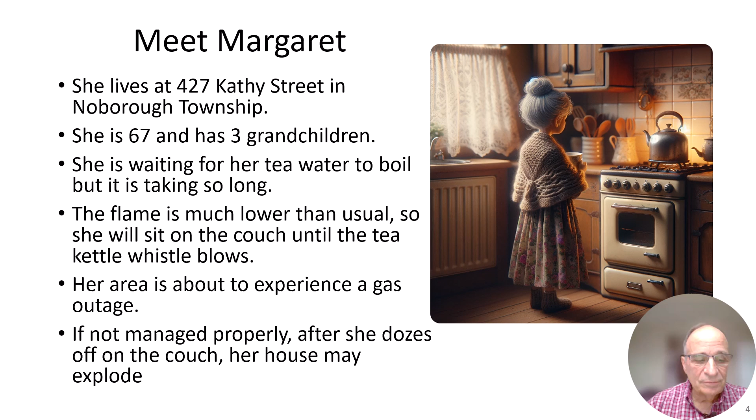Now meet the new Margaret. She awoke outside her house with her hair smoking. She never did get that cup of tea, and she gets real cranky when she misses her tea. But what really has her angry is that her house is no longer in its place, but scattered across the property. She does not know it yet, but her house blew up due to a mismanaged gas outage.

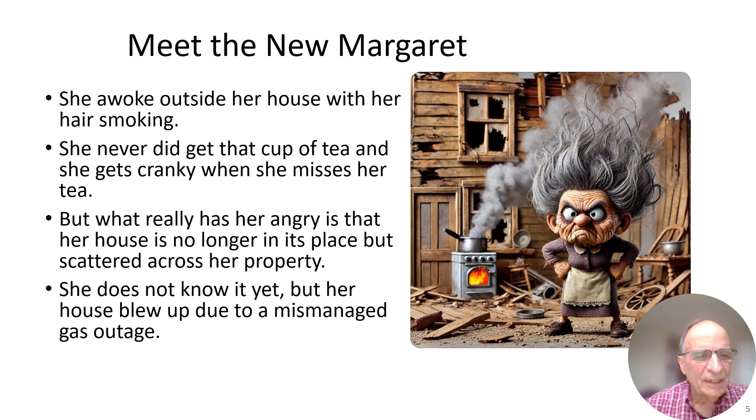What is the hazard associated with a gas outage? In a gas outage, low gas pressure may cause the flame on an appliance to extinguish. If the appliance is not equipped with a flame-sensing shutoff device, the valve that allows gas to flow will remain open. When the gas is restored, gas pressure is restored to the gas main, the gas will resume flowing into the appliance, which no longer has a flame to consume the gas. That gas accumulates in the house and reaches the explosive mixture range. The air-gas mixture finds the source of ignition and explodes because the house is an enclosed space.

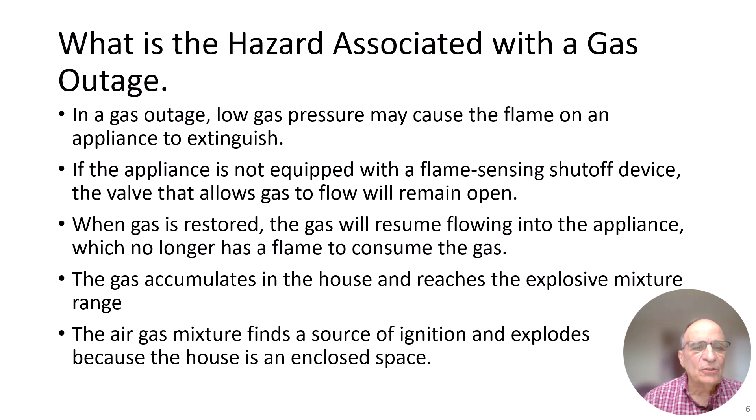How low of a pressure would cause a flame out at an appliance? It's unknown because each appliance is different and each house piping setup is different. Some local distribution company operators use the following as guidelines for what they consider low pressure concerns. For a 60-pound system, they typically use 5 psi. That doesn't mean that you'll get a flame out if you get to 5 psi, but it's the pressure that is of concern to the LDC operator. For low pressure systems that typically operate between 6 and 8 inches of water column, pressures below 4 inches of water column would be considered insufficient or of a pressure that would be a concern to a gas operator.

Many gas appliances have gas regulators on them that are set to supply 3.5 inches of water column to the burner. Now, the numbers that I mentioned are not necessarily meaning that below those pressures you'll get an appliance flame out, but it's where LDCs typically get concerned about the potential for a flame out if the pressures get that low. The other thing to be concerned about is that where you're getting your pressure recording may not be the lowest point in your gas system. So a gas system analysis study would tell you where the lowest points are. And also the telemetry involved in getting feedback to the control center may not be accurate. We'll talk about that a little bit later on. But these are some of the concerns that we will address.

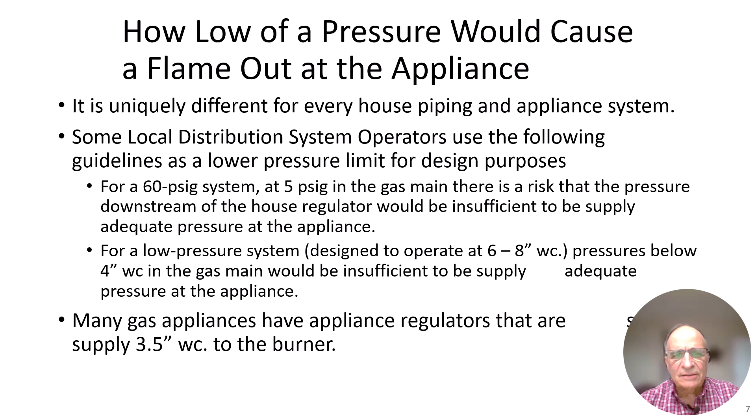So what are normal distribution operating pressures? They're dependent from company to company. But for the most part in the United States, it's very common to find 60 psi systems, and also in some of the older city, low pressure systems. A 60 psi system has 60 psi gauge as its MAOP, maximum allowable operating pressure, but it might typically operate between 20 and 50 psi-G. Inches of water column systems are typically found in the older cities, and these would be operated between 5 and 8 inches of water column. When you get down below 4 inches of water column, it starts getting to be a concern because of lower pressures being applied at the appliances.

A gas outage can happen any time of the year, but LDCs are most vulnerable during the coldest weather conditions.

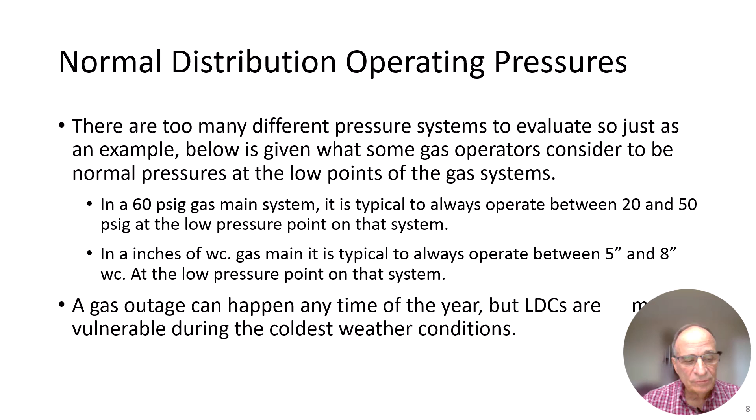I'll now talk about gauges and telemetry. They cannot be trusted for accurate readings.

Here's why. You're operating a system for 10 years, you've never had a gas outage, and you're always looking at your gauges from the control center. The question I have is, when was that gauge and telemetry last calibrated? You might have a zero offset, or a span offset, or some false reading, and you're off by maybe 3 psi.

It's not much of a problem if you're operating between 20 psi and 50 psi with a 3 psi error. But what if you're reading down to 5 psi and you have a 3 psi error? That 5 psi may really be 2 psi, or it may be 8 psi.

So depending upon telemetry information that has not been recently calibrated is a concern. The other concern you deal with is, where is the low point in your gas system? You may have a feedback coming from your gas system that you think is near the low point, but is not the low point. So yes, you may be reading 5 psi, but maybe a half mile down the road it's 2 psi, and that is not where you have telemetry.

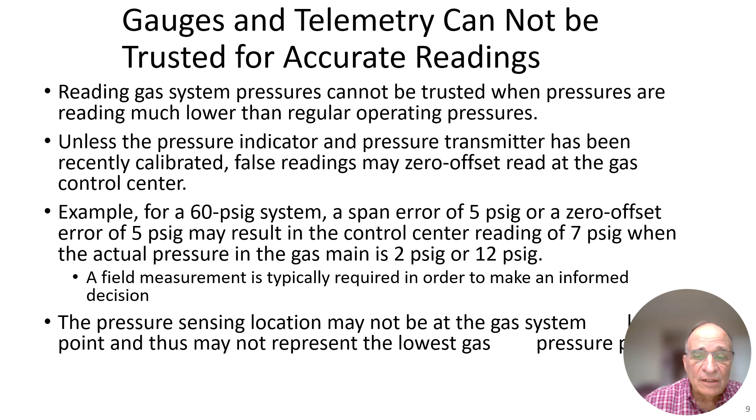So it's important to review your gas system annually, do the analysis annually, and keep your database of gas mains and services updated.

The clear telltale outage indicator would be once customers start to call in complaints of low gas pressure or no gas. The gas operator can be fairly sure the gas outage needs to be declared.

Declaring a gas outage is a serious matter. Once the gas outage is declared, the area affected needs to be isolated from the rest of the gas system. This can be easy or extremely difficult, depending on the type of system, grid versus tree type, and the existing availability of valves to isolate the system.

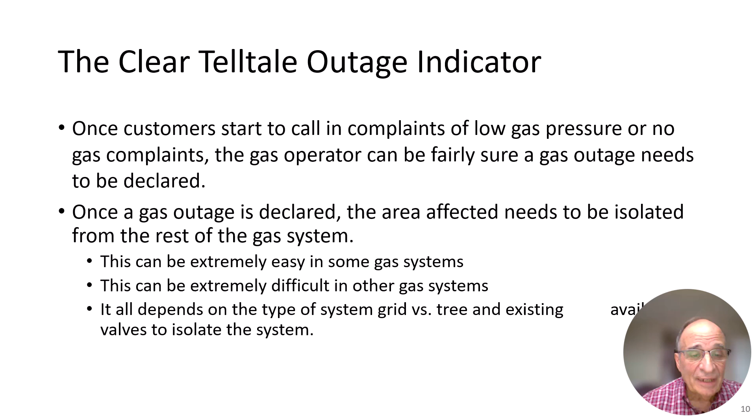In low pressure systems, there are often no valves or very few valves, and isolation could be extremely difficult, requiring isolation of an even larger area than necessary, because the valves that are available only allow that larger area to be isolated, thereby not allowing gas to flow into the area that experienced an outage.

Declaring a gas outage is a serious decision. Once a section of the distribution system has experienced low pressure, even momentarily, the LDC operator needs to decide if the low pressure was sufficient to declare a gas outage. That decision is utility specific, because every utility has its unique customer base and unique distribution system piping layout.

If the low pressure is enough to cause a flame outage and an outage is not declared, you run the risk of gas accumulating in a building because an appliance was left on, one that did not have a flame sensing valve.

That appliance, once gas comes back on, can bring gas into the house and cause a gas accumulation. If the low pressure was not low enough and a gas outage is declared anyway, it results in extreme hardship to the customers, the LDC, and the PUC that regulates that utility.

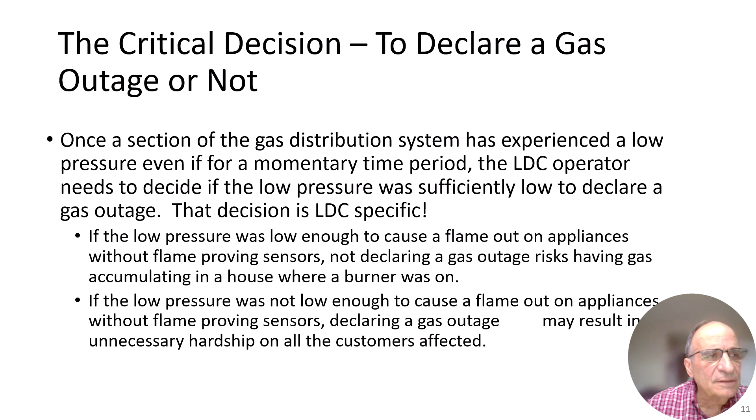Once a gas outage is declared, the gas operator needs to ensure that gas is not restored to the affected area until gas service to every premise is either valved or shut off from the building so that no gas can enter. If it is suspected that a significant amount of air has entered the gas main during the outage, it will need to be purged out before gas is restored to the main.

It is typical to handle this in subsections, because a gas outage of any significant size cannot really be handled as one big chunk of territory. Segregating significant areas and managing them separately allows the gas utility to bring customers back online in stages. Field offices will need to be set up, and typically as many qualified persons as possible are put on 12-hour rotating shifts to restore the gas outage.

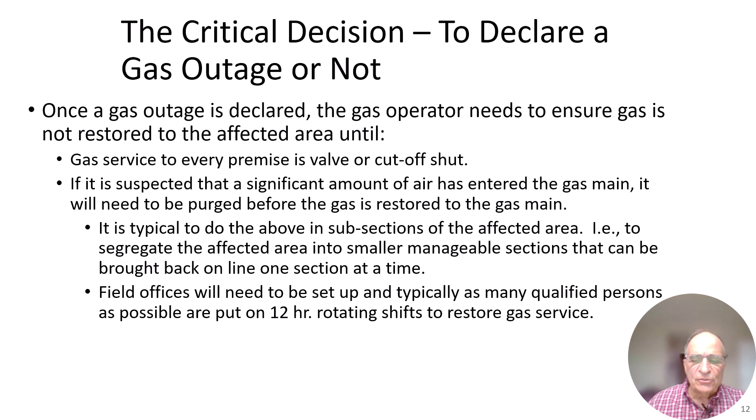Restoring gas service after an outage is complex. Once every premise is physically shut off from the gas supply, either by closing a service valve or by digging an opening and cutting that service to the house—which may be necessary if no one is home and there's no external shut-off valve—crews may have to dig a hole and do a cut and cap on that service to continue the restoration, then come back to that house after the gas is restored.

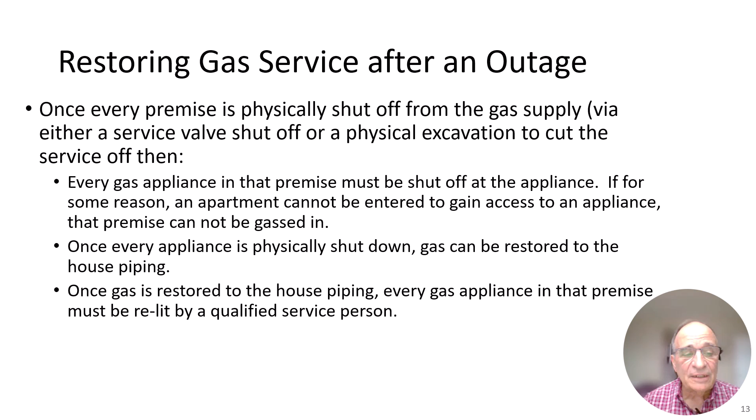Every gas appliance in each premise must be shut off physically at the appliance. If for some reason the apartment cannot be entered or access cannot be gained, that premise cannot be gassed in. Once every appliance in a building is physically shut down, gas can then be restored to that house piping. Once the gas is restored to the house piping, every appliance must be relit by a qualified person.

Record keeping can be a nightmare during a gas outage. You have to keep records of every single premise, whether access was gained, whether they were able to shut them off, and whether they were able to do the relights. You may also be dealing with personnel from outside your immediate area if mutual aid is helping out. So it's typically a nightmare to keep the records of every building, every premise, every apartment, especially where you're dealing with apartment buildings.

Checking and double checking is critical, as one mistake can result in an explosion. Making sure each operator's qualifications are up to date for the work, and accounting for their hours worked, is also critical. It's a large clerical task, as many personnel will be needed from many parts of the operating company.

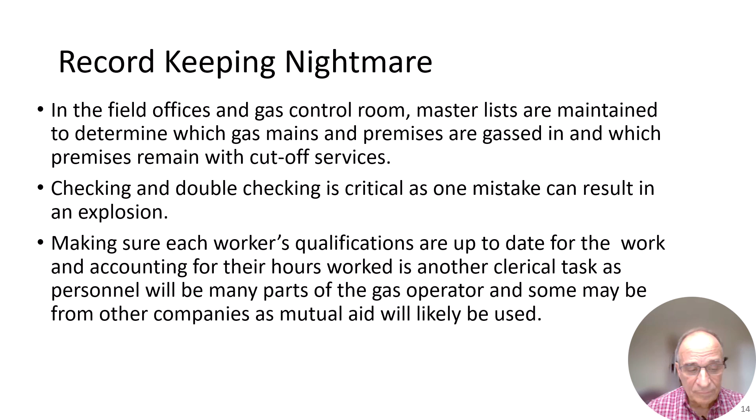What will be the impact on customers? Well, that depends heavily on how big the outage is. If it is in winter, the impact on customers can be quite severe. Many customers without heat will relocate to relatives or to shelters, and persons in critical care facilities such as nursing homes and hospitals may need to be relocated. This type of stress, in extreme cases for the very fragile, can result in worsening of health or death.

House water piping may freeze up, resulting in severe water damage to those buildings. Even nearby shelters may be without gas, so the actual shelters used may be inconveniently far away from the affected area. Local restaurants and businesses will likely be closed down, causing an economic loss and unemployment for workers. The local economy will certainly take a hit. Perishable foods may also be destroyed if that gas supply also supplies regional power generation.

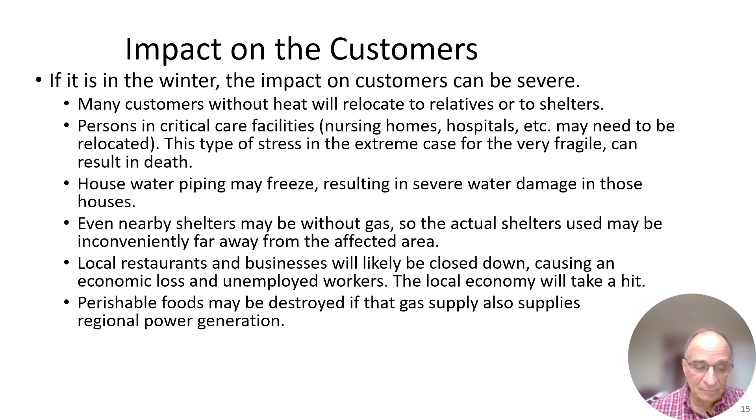What is the impact on the local distribution company? Responding to an outage is an all-hands-on-board event. Racing against the clock is critical, as the longer the premise is without gas, the more hardship the customer experiences. The more risk there is to the piping freezing up, and air may enter the gas main or the house piping. Restoring a gas outage may take one or many weeks until every appliance is relit.

The cost of an effort is staggering. Monitoring of personnel fatigue and mistakes is a critical task that must be taken care of, to make sure that no errors are made during this very unusual occurrence.

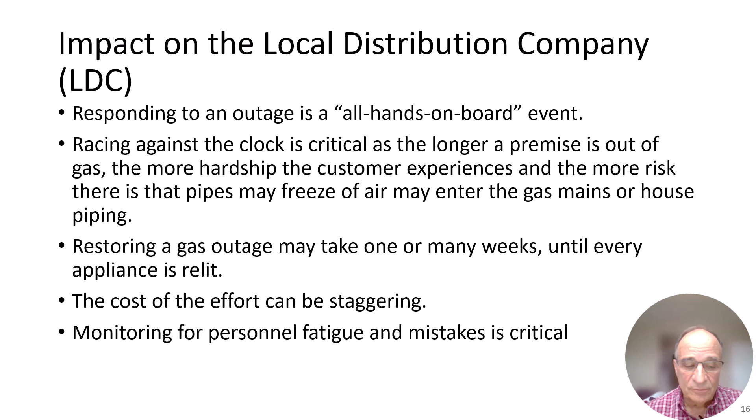More on the impact on the local distribution company. Regardless of the cause of the outage, the reputation of the gas distribution company will be damaged. If it is found that the outage could have been avoided by prudent preparations, the gas operator can be liable for fines or lawsuits.

The local distribution company will need to legally settle with each customer that was inconvenienced. The cost of the entire outage restoration will be significant and may be deemed as not recoverable through rate increases. The gas not sold during that outage will result in a loss of gas revenues.

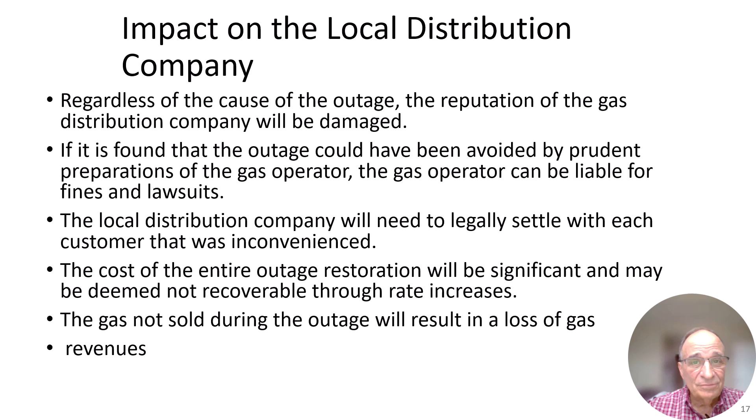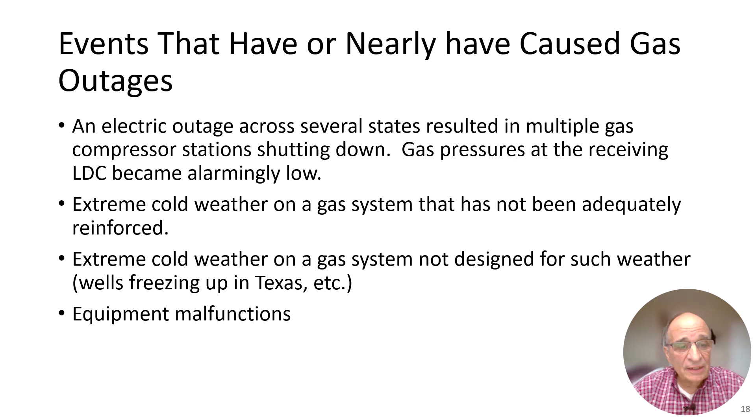Events that have or nearly have caused gas outages include an electric outage across several states that resulted in multiple gas compressor stations shutting down, with gas pressures at the receiving LDCs becoming alarmingly low. Extreme cold weather on a gas system that has not been adequately reinforced, or not designed for such weather, such as when the wells froze up in Texas during a very cold couple of days, has happened several times over the past two decades. There are also always equipment malfunctions that could cause a gas outage.

Other events that have or nearly have caused gas outages include operator error, such as operating the wrong valve or shutting the wrong valve during maintenance, pipeline rupture or physical damage to the pipeline, and incorrect data input into the flow prediction software. Typically Synergi is used, but I'm not endorsing any particular software, though that's one I know a lot of companies use. There's also physical sabotage and cyber tampering with the telemetry.

Interruptible customers consuming gas when they're not allowed to burn is another cause. When it gets real cold and you tell your interruptible customers to come offline, but they stay online, they're going to be reducing the amount of gas available for your firm customers. Rolling blackouts during extremely cold weather is another event.

I'm going to give that special attention. We'll talk about that on a separate slide, because that is a unique type of gas outage that can be extremely difficult to manage.

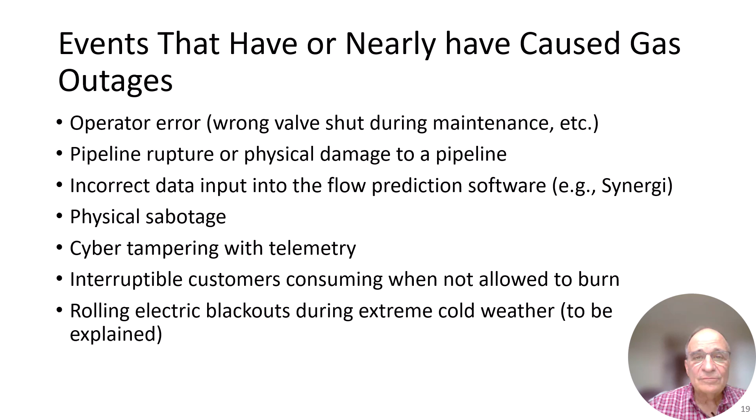What is the role of LNG in preventing outages? LNG assets are within the gas operator's territory and fully under the gas operator's control. That is a big plus because it isolates the LDC from events that take place outside of this territory, maybe upstream on the interstate pipeline or across several states, like an electrical outage across several states causing a shortfall. Having those assets right within your territory allows you, the LDC, the ability to bring that gas online very quickly if it is so configured.

The system is not affected by events outside of its territory, so it has control of this LNG asset, but it's not as easy as it sounds. LNG assets must be ready to come online when an outage is imminent, so during the winter it's typical to keep those assets online, ready to go. When that equipment is in standby, pumps can take anywhere from 12 hours to cool down in some configurations. Other configurations can come online within a minute. If the piping is already cooled down up to the vaporizer header, then vaporization can start within minutes.

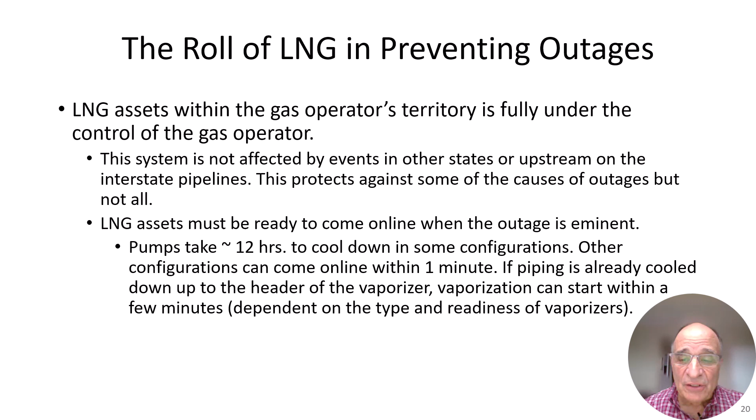It is critically important for a utility to run reliability analyses, typically at least once a year, doing a diligent reliability study of your entire gas system. In doing that, you need to make sure all your data sets are updated, meaning that if there's a cut and cap in the territory, it is reflected in your Synergi or whatever software you're using for your analysis.

Each critical main and facility in the distribution system needs to be ranked with a well thought out probability of failure, and that value needs to be a key parameter in the analysis of where to place an LNG facility. This value needs to also be used in creating the design basis for your LNG plant. Also, the potential for interstate force majeure needs to be considered when creating and designing the design basis for an LNG plant and for where you're going to locate that LNG asset.

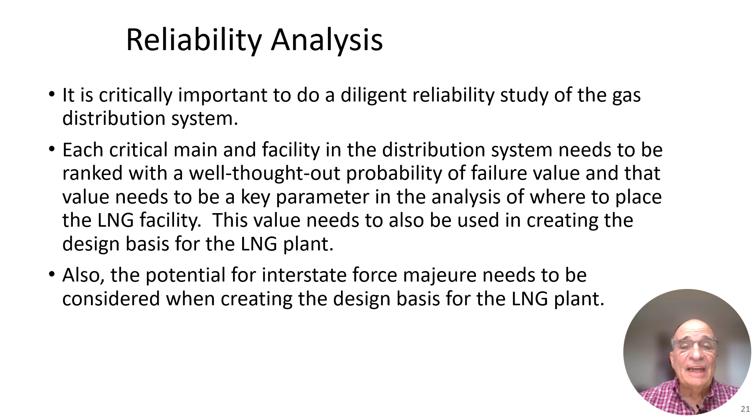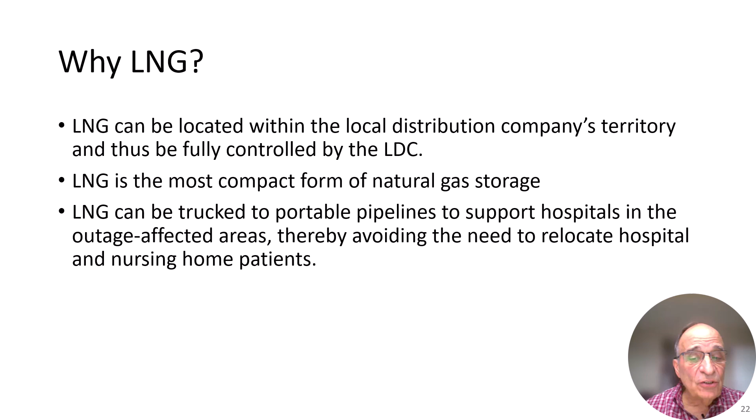The question is why LNG, not CNG or some other means of avoiding an outage by having storage within the territory. LNG can be located within the distribution company's territory, and that's one of its biggest advantages. LNG is the most compact form of natural gas storage. LNG can also be trucked via portable pipelines to support hospitals in an outage-affected area, thereby avoiding the need to relocate hospital and nursing home patients.

And when should LNG be considered for reinforcing or preventing outages within an LDC?

All too often, the latch is put on the barn door after the horse gets out. Our job as prudent gas operators is to be proactive in protecting our customers. It is prudent to prepare for an outage before an outage, not after an outage.

Think long term. It will take at least 5 years from the time of conception to the time of commissioning for putting an LNG plant into service. Build larger rather than smaller, because 5 years is a long time, and during that 5 years, load may grow and your vulnerabilities may increase. Your needs will be an additional 5 years out.

So plan the tank size and the projected needs of vaporization 10 years out instead of 5 years out. Also plan for future expansion. If you're purchasing land, perhaps you want to purchase enough land for additional tank in the future or for additional vaporizers.

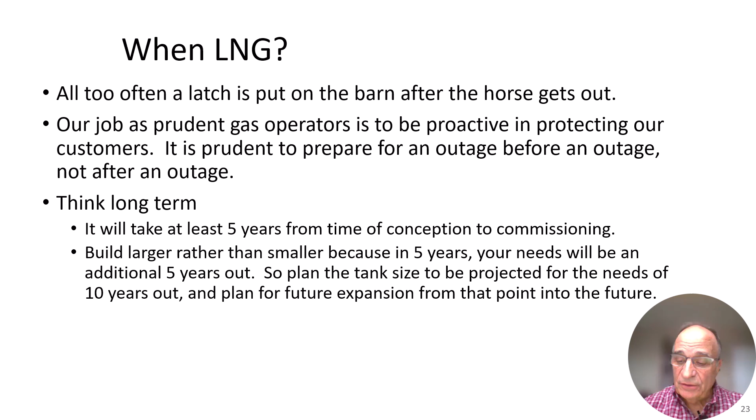Also, make sure you consider interchangeability of LNG wherever you're placing that LNG facility. Boil-off gas may have a higher heating value of 1,000 BTUs per standard cubic foot. Vaporized LNG may have a higher heating value of 1,100 BTU per standard cubic foot. Wobbe number of BOG and vaporized LNG will always be different, and the pipeline gas will be different as well. The higher heating value and Wobbe number of the BOG mixed with rejected gas from the liquefaction system will also be different than both BOG and vaporized gas, and also different from pipeline gas.

For areas where therm billing is a consideration, all of these factors have to be taken into account so that you don't end up having customers that are in a fixed therm billing zone receiving gas at 1,000 BTUs at one point, 1,050 BTUs at another point, and 1,100 BTU gas at another point in time.

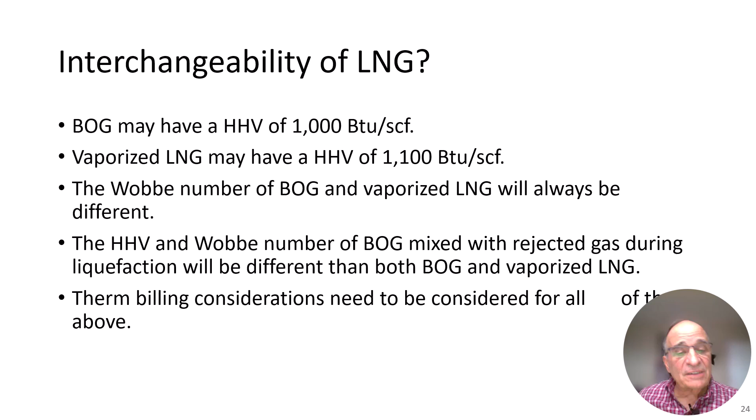There are limitations to using LNG. LNG can help, but there's a limited quantity available. If you have a 1 BCF tank, at best you'd be able to get 0.9 BCF, and that's because you're never really at the high point or the maximum fill of your tank, and you never really can draw the tank all the way down. You need to have a heel in the tank.

Vaporization capacity is limited to the vaporization that's at the plant. You cannot exceed what your vaporization capability is, so meeting challenges of very high curtailments of natural gas can be difficult, and you could end up with an outage even if you have LNG available.

An LNG plant is a complex conglomeration of components that must all work in symphony in order to do send-out, and it's not as reliable as a pipeline supply. So reliability of the LNG facility is certainly an issue. Perhaps the LNG facility is experiencing maintenance at the time when a pipeline shortage occurs.

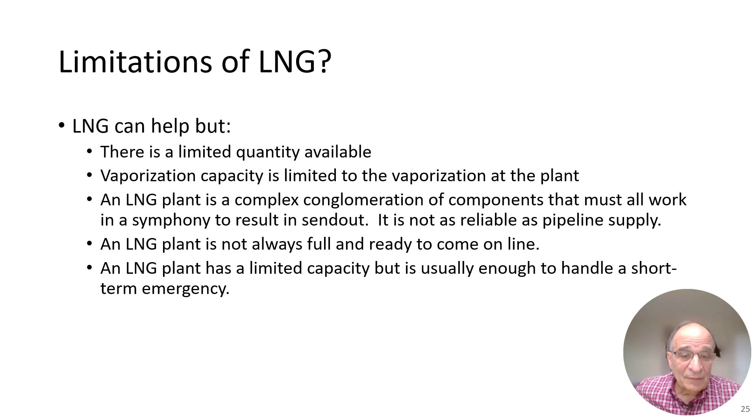Also, you need to have other systems all in place, such as odorant systems and all the support systems for the LNG plant. An LNG plant is not always full and ready to come online. An LNG plant has limited capacity, but it is usually enough to handle a short-term emergency, and of course it depends on the magnitude of the emergency.

When we talk about reliability of an LNG facility, we're talking about when you need it, is it there? And if your pumps are warm, it is not there in a short time frame. Warm pumps typically require about 12 hours to cool down. And cooling down the line from the pumps to the vaporizers typically takes another hour. It can be sped up in an emergency situation, but that pump cool down cannot be sped up.

If you have in-tank pumps, well, then they're always in the cool down state, and those will always be ready to operate. However, you still have to cool down the line from the pumps to the vaporizers.

Odorant systems must be functional. So even if you have the LNG and everything's ready to go, but your odorant system is out of service, you're not allowed to put send-out into the gas pipeline system because it would not have odorant, which is required by code.

ESDs must all be cleared. LNG pumps must be cooled down. Piping must be cooled down. Vaporizers must be ready to operate. Let's say you have water submerged combustion vaporizers. Well, they need to be filled with water and ready to operate. Any kind of vaporizer maintenance that's taking place would certainly make those vaporizers not operable if they're in the middle of such maintenance.

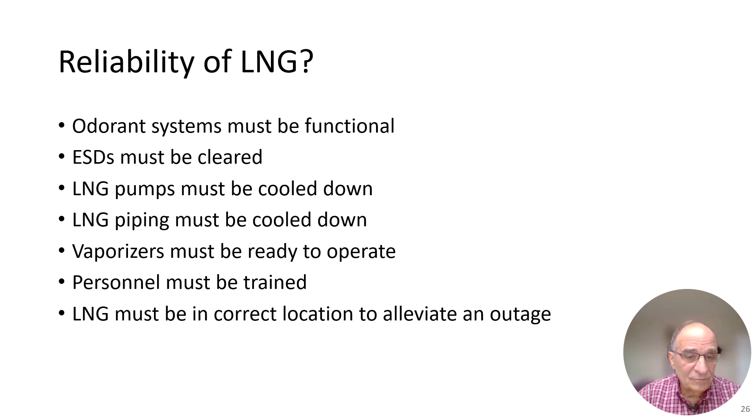One of the concerns is the capacity of your LNG tank. If you're running partially into the winter, you may have already used up 40% of your LNG tank. So to say that you have 90% of your tank available is really only under ideal conditions. Fact is, 80% would be fortunate if you had that much available.

You also have capacity of your vaporization. Vaporizers might be good for, let's say, 100 million a day, and let's say you use them for that 100 million for one day. It's going to take you how much liquefaction time to make up 100 million? Typically, your liquefier is about 5% of your vaporization capacity. So if you have a 100 million a day vaporization capacity, you might have only a 5 million a day liquefaction capacity. That means it'll take you 20 days to refill one use of vaporization at max vaporization.

But in reality, you also have boil-offs to take care of. So it's going to take you more than 20 days to refill one full day of vaporization capacity.

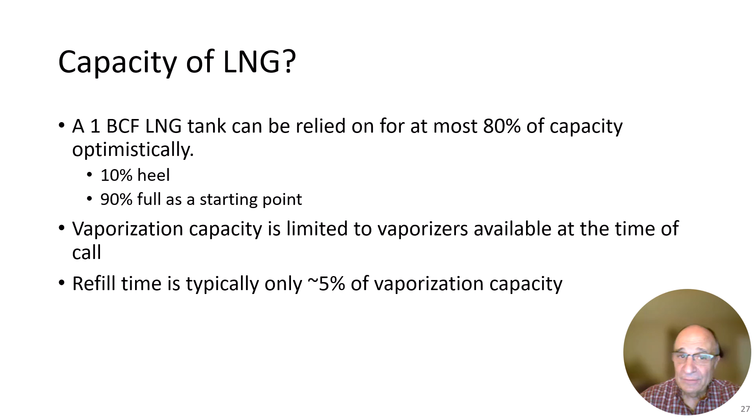So let's take a look at the amount of time it may take you to refill. Let's say you've already used 300 million standard cubic foot from your LNG tank. Assume you have a 1 BCF tank. Well, at 5 million a day refill time, it'll take you 60 days to make up 300 million. But you also have to take care of boil off, so there's another 6 days. That's 66 days. Let's say once during that time you have a shutdown that requires you to derime, meaning warm up the plant. Well, there's another 6 days lost. So already you're up to 72 days of time that's needed to make up that 300 million standard cubic foot.

Well, you could look at trucking in LNG, but even if trucking in were to be used to refill, an LNG tanker only holds 0.8 million standard cubic foot of LNG equivalent. So to fill up 300 million standard cubic foot, you're talking about 375 tanker truckloads. And that's not including the flash gas and the bog or any other shortages that may occur during your unloading. Like you may not get a full 0.8 million standard cubic foot in a tanker truck.

A derime and a restart may interrupt filling up the LNG tank, and a derime is when you warm up the liquefier because it had frozen up or for some other reason you had to warm up the liquefier. Deriming means to send warm gas through the liquefaction plant and dry out any moisture or any solids that may have occurred due to heavy hydrocarbons or carbon dioxide or water.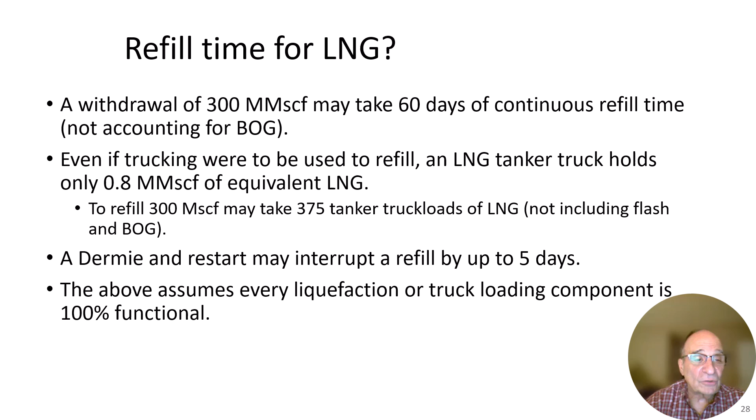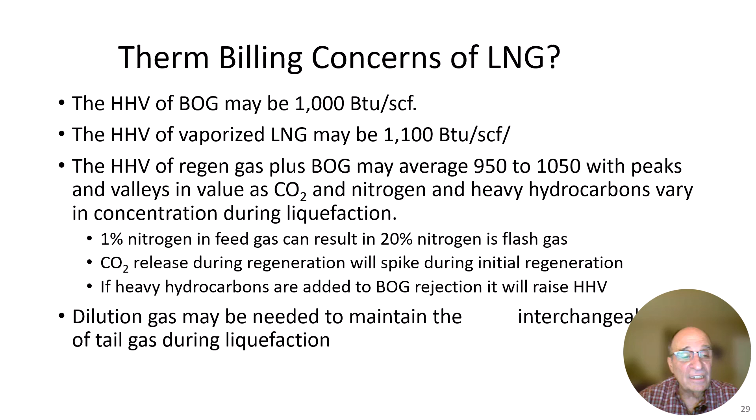CO2 releases during regeneration will also spike. Initially, when you start to regenerate a mol sieve, you get high levels of CO2 coming out and high levels of water vapor. The water vapor won't harm your customers too much, but certainly the CO2 could change the burning characteristics and the interchangeability of that gas. If heavy hydrocarbons are added to the bog that is rejected, that will raise the higher heating value. So dilution gas may be needed to maintain interchangeability of your tail gas during liquefaction.

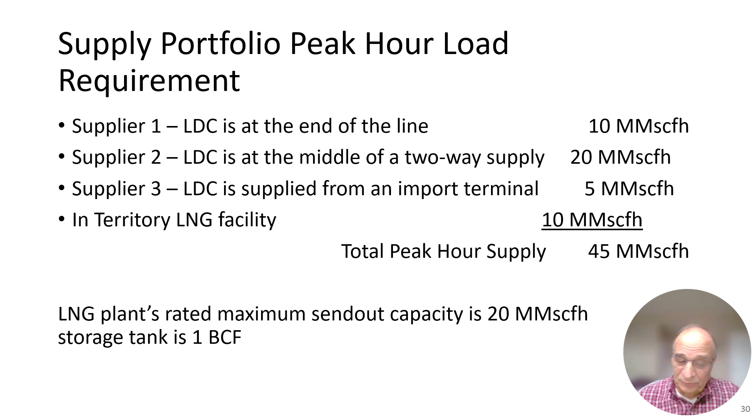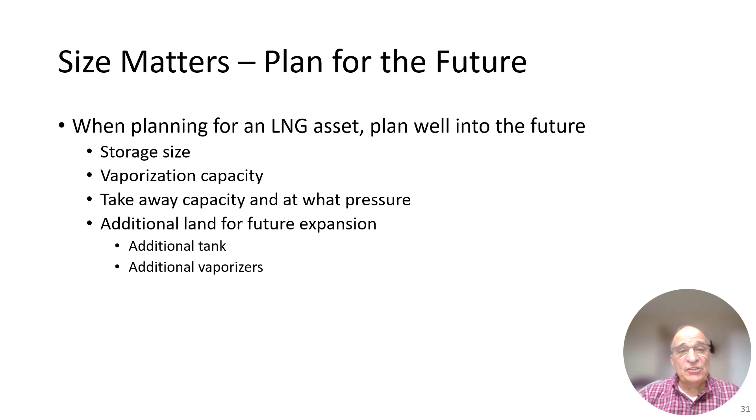You've heard the expression 'size matters,' and for an LNG facility it certainly does. Plan for the future. When planning an LNG asset, plan well into the future. Think about storage size, vaporization capacity, takeaway capacity of your pipeline, and at what pressure. Consider additional land for future expansion, perhaps an additional tank or additional vaporizers. High pressure LNG send-out has some preference because it can go directly into the transmission system and reach a large part of your territory.

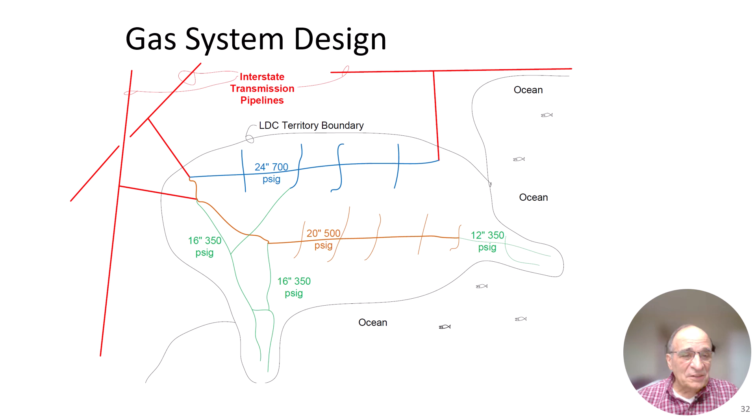I looked at where I'd put an LNG facility, but I did not base it on an analysis. What you really need to do is a rigorous analysis of what would cause a gas shortage in your territory, and where would be the best place to put an LNG facility.

What is the reliability of this pipeline supplier, and this one, and this one? Historically, how reliable have they been? And also, what is their exposure? Are you at the very end of the pipeline from Texas and Louisiana? Let's say you're up north in the Northeast, at the very end of this pipeline — that leaves you very vulnerable.

So you attach rankings to each of your supplies as to what their vulnerability is. Then you look at potential line breaks — a break here, or here, or here, or somewhere here. And then you apply to that ranking: if you had a break here, how many customers would you lose if you ended up not having an LNG facility?

And then if you had a break here, how many customers would you lose if you did not have an LNG facility? You do that matrix and look at what location would give you the best coverage for reliability for your territory. Now you may end up finding, oh yeah, here's the perfect spot, but it may not be able to put an LNG facility there because it's a politically sensitive area. Perhaps it's a very high income area, and there's a lot of public pressure, which results in political pressure not to put an LNG facility there.

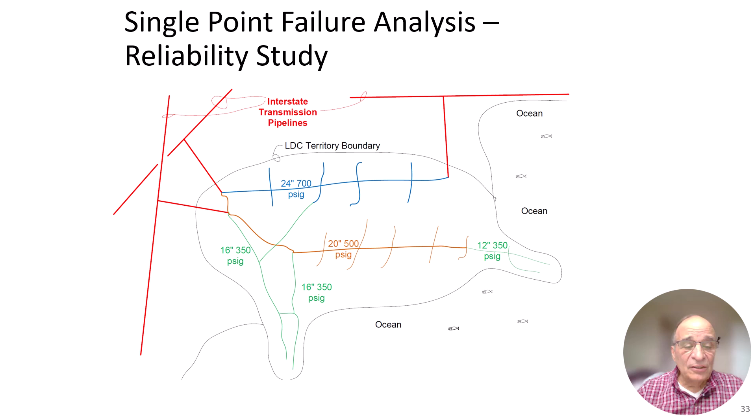You may end up having to put it somewhere else in your territory. Looking at this picture, I'd say it would be nice to have an LNG facility here and a satellite facility out here, and this would cover me pretty well for a lot of different scenarios. But that's done without having the analytical data to look at the reliability analysis.

When performing a gas system reliability analysis, you look at single point failures. You quantify the single point failures. What's the probability of that line having that single point failure? And then what would be the consequence of that single point failure? In doing that, you now have an understanding of how the probability and the consequence can be merged together to give you the risk associated with that particular form of an outage. It could be a line break, or it could be an interstate supply that cannot supply the gas needed.

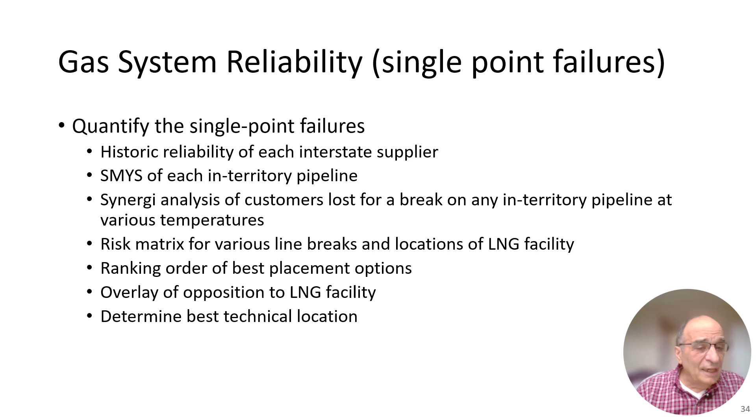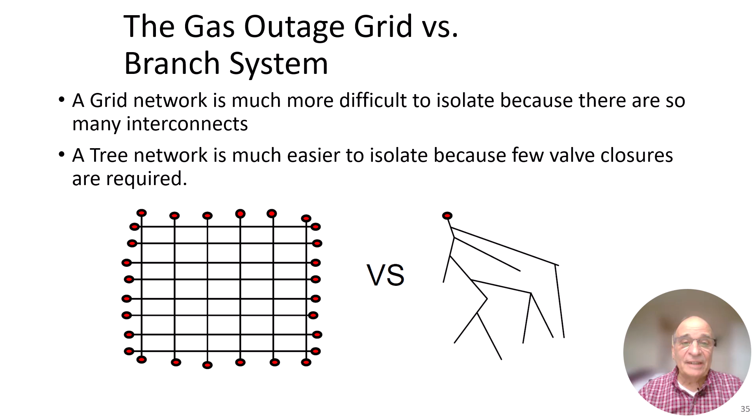If it's a branch system, you're in a much easier situation. You can shut, in this case I made it a single valve, to take this entire part of the territory off the grid, so to speak, and now you can do your isolation of the buildings and your part-by-part relight. In this case, you'd bring gas, isolate all the building services from here to here, and then do a relight on all those appliances. Then you'd open this valve, do the same here, open this valve, do the same here, making sure that you've secured each building as being shut off from the supply of gas before you bring gas back onto the gas main.

Gas outage prevention and mitigation measures: having a load shedding plan is important. A load shedding plan has areas of the territory that can intentionally be cut off, which would prevent a large-scale outage by literally removing small sections of your territory from the gas grid. An analogy would be removing an arm so that the whole body lives. It's not an ideal situation, and the customers that would be involved in the load shedding area would probably complain loudly if they know that they are pre-targeted as customers to be load shed in the event of a supply disruption.

It also requires all interruptible customers to actually come offline when they are required to. I say actually come offline because quite often when you call an emergency and tell your interruptible customers to come offline, many of them continue to burn. That can cause a large-scale outage if they don't actually come offline.

Your predetermined areas of value have to be valued by the load they consume, the demographics, the fairness, the consequence of shedding that area, and your ability to cut off and restore that area after gas supply comes back. You should also have a crisis management plan, different than a load shedding plan, but it may be used during one.

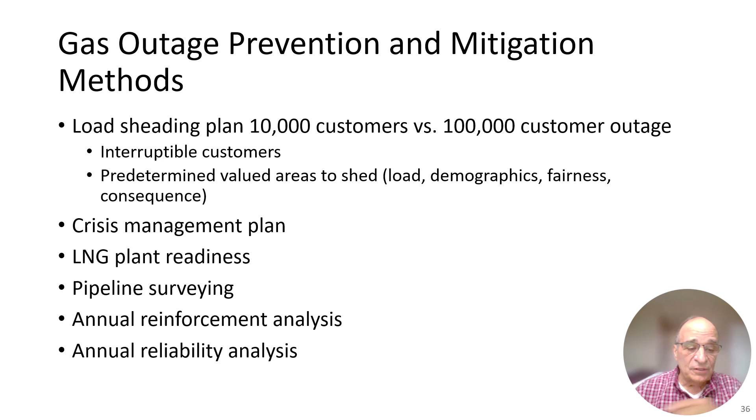Now, will these be the right areas to load shed? That depends on the analysis that needs to be done, the number of customers, and the amount of load associated with it. But having a load shed plan is an important preventative measure that would mitigate the consequence of an outage. This might be 10,000 customers that have to be restored versus 100,000 customers. The larger the restoration area, the more complex it gets. It's not a linear relationship—as you go from 10,000 to 100,000 customer outage, the complexity grows exponentially.

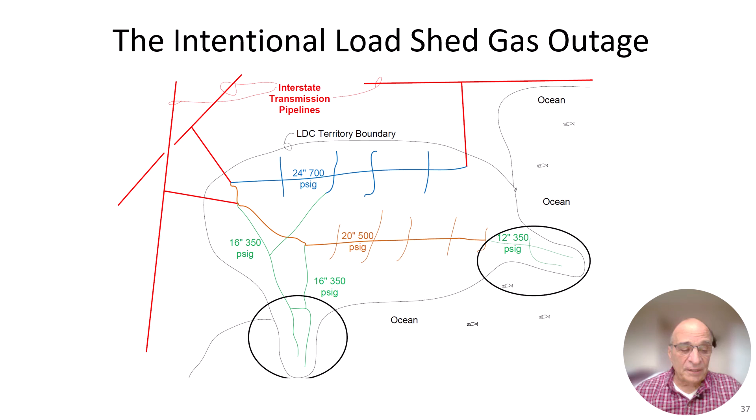Having recovery equipment and procedures in place in advance of a gas outage is a good practice. Load shed plans written, with procedures and drills performed, will help your staff be ready to manage a load shed event. All administrative forms for addresses, contact information, gas service information, and load information for the designated load shed areas would be pre-printed and ready to go.

Mobile command centers would be available, perhaps in the equipment yard now and ready to roll with all the necessary equipment. You don't want to find, when it's time to roll out your mobile command center, that the battery is dead or the radios don't work, or some other consequence like that.

Up-to-date organizational structure is important: an updated list of qualified isolation personnel—people qualified to operate valves and relight—an updated list of qualified supervisory personnel, and an updated list of qualified relight personnel. All of these things are important so that if an outage has to occur, you can do your load shedding in a very effective and organized way.

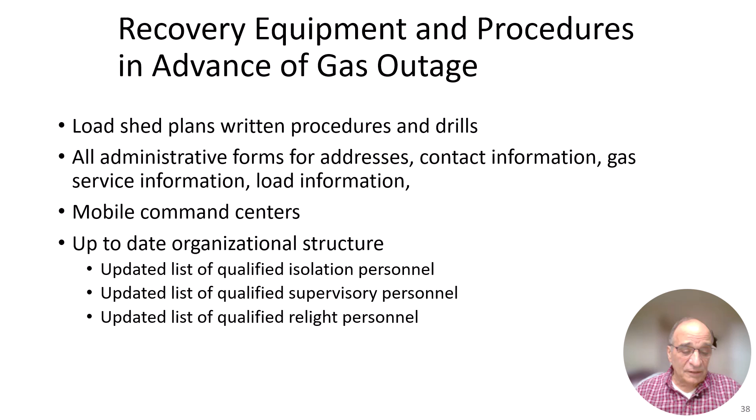You can also make strategic use of LNG assets. Advanced plans to maintain hospitals and shelters heated and supplied by LNG portable pipelines is one method. Analyze in advance what pipelines need to be connected to your LNG facility to make it most effective during an event that might result in an outage.

We looked at the territory earlier and I said here might be a good place for an LNG facility. Maybe along with that LNG facility might be a run of 2 miles of piping to interconnect it to another large section of your territory. This is the type of analysis that needs to be done in advance.

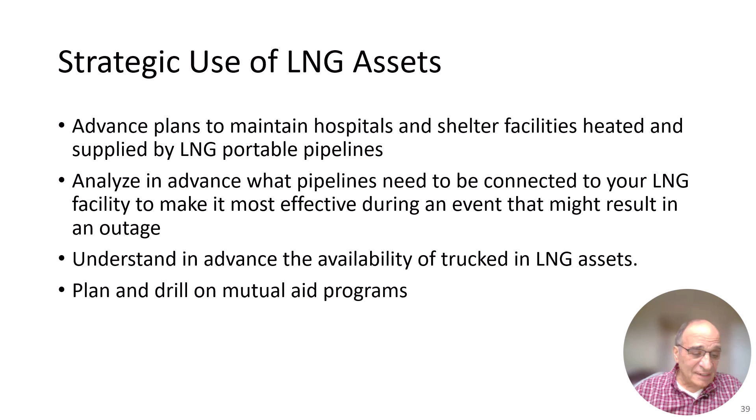Understand in advance the availability of trucked-in LNG assets, such as portable pipelines. Plan on these events occurring and drill on them, and have mutual aid programs in place. Mutual aid brings in assets from other companies to help you in the event you have a gas outage, and it also provides your personnel to the other companies in the event they have a gas outage occur.

These are good applications for maintaining facilities as well, such as a hospital. That's a hospital that may be in an outage area, and you need to keep that hospital online. This would be one method of doing that.

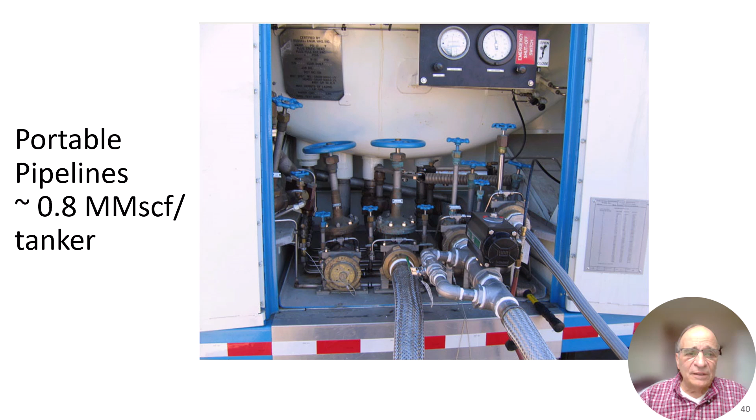Portable pipelines use LNG tanker trucks, and each LNG tanker truck can carry an equivalent in standard cubic foot of 0.8 million standard cubic foot.

So in this particular case, the skid comes on site, the vaporizer is put at least 50 feet away, and heating lines are connected. This vaporizer is good for 250,000 standard cubic foot per hour, provided that you have an LNG truck that's providing the LNG to the vaporizer itself.

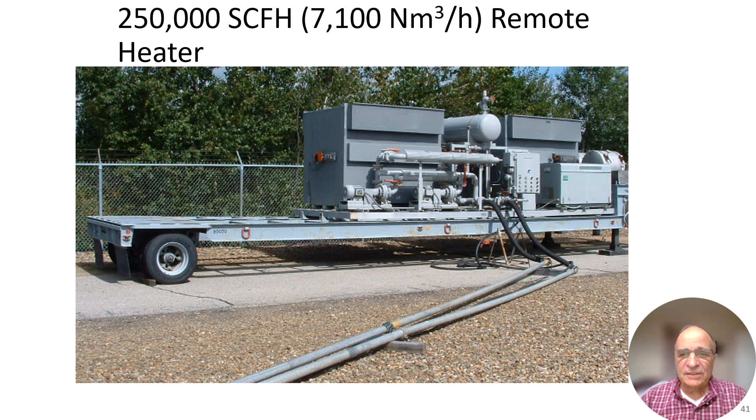One of the things that's critical is you can't stop the flow of LNG, so you need to have trucks available. One is feeding, the next one is connected onto the same manifold and ready to feed, so that you get an uninterruptible supply of LNG to these vaporizers.

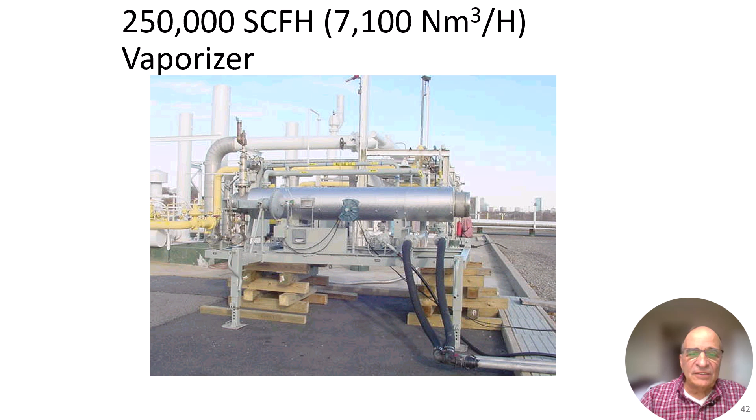Now these are different than the one I showed you. They're not modular and separated - 3 large vaporizers. In here is a water bath, typically a water ethylene glycol mixture or propylene glycol mixture. You have these water baths, and a furnace that's blowing hot combustion gases through tubes in that water bath and exhausting the exhaust products.

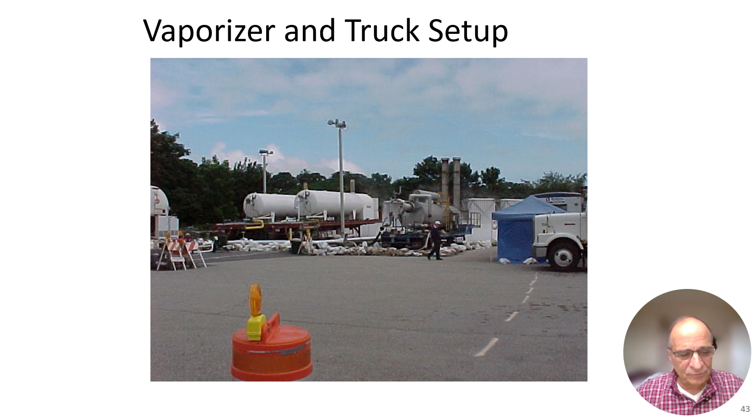Here are the 3 trucks that are on site. Typically, when one empties, it will go back and fill up, and the other 2 will stay on site to provide a continuous flow of LNG to the vaporizers. When that full truck comes in, the next nearly empty truck would head out to be refilled.

This would continue 24 hours a day until the outage is over. In this particular case, this was a town that was intentionally isolated from its interstate transmission system because that system had to be upgraded.

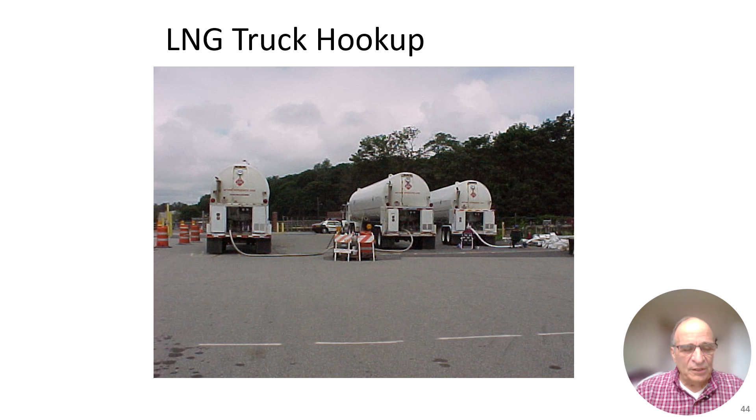When using portable pipelines, it's typical to pressurize the truck itself by using coils underneath the truck. Some LNG is put through these ambient heat exchanger coils, causing vaporization, which pressurizes the truck and allows the gas to be pushed through the vaporizer.

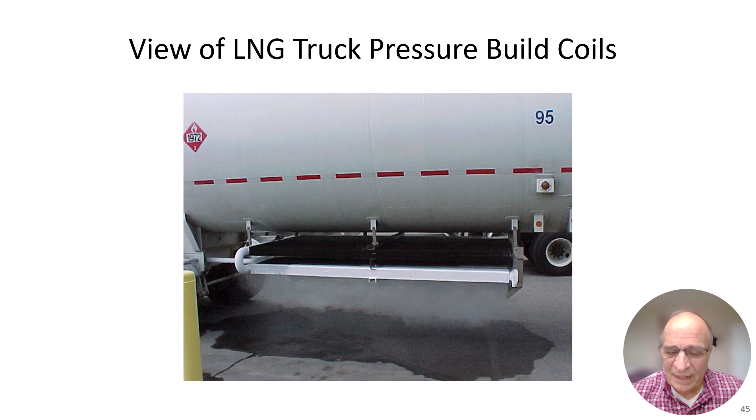That'll only work if you're dealing with systems that are typically 60 psi or lower. If you want to go into a high pressure system, say a 250 pound psi MAOP line, you'd have to have LNG pumps associated with the portable pipeline. But if it's a lower pressure system, you can just pressurize the tanker truck, and that will push the LNG through the vaporizer.

This is a 200,000 standard cubic foot per hour vaporizer, and there's a stack over here. Knowing how it's constructed, the burner is on this end. It blows combustion gases through tubes that go back through a water ethylene glycol mixture, and the exhaust goes up the stack. It also has a pump that continuously mixes the glycol water and creates flow across those tubes. Here is the manifold where your LNG hooks up and your natural gas comes out.

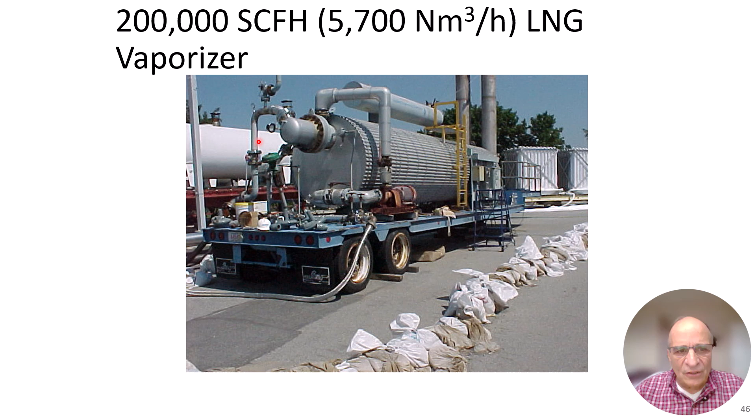It's a split manifold, so it has a separation. On one side, LNG goes down tubes and comes back as vapor, and on the other side, the outlet vapor goes out to the pipeline.

This is a view of the same vaporizer. As you can see, an attempt was made to build a dike around it using sandbags. In hindsight, it probably would have been better to use some other means of providing a dike, because I don't know how well the bags themselves would hold up at cryogenic temperature. The sand will hold up, but what about the bags? That's only a thought that came to mind yesterday, re-looking at these slides prior to making this recording.

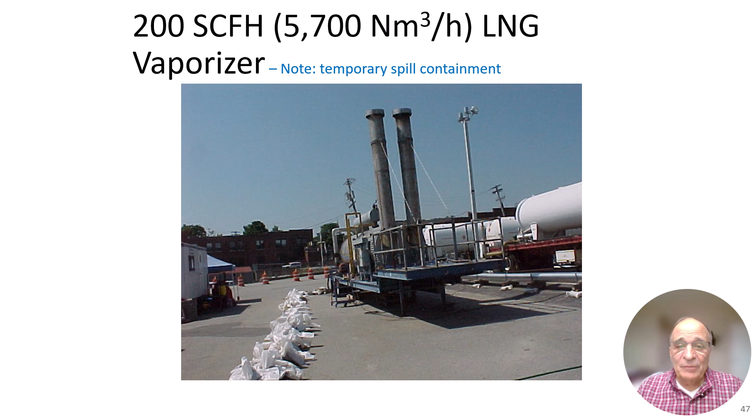In this slide, we see two ambient vaporizers rated at 60,000 standard cubic feet each, which are nothing more than finned tubes that use ambient air to heat up the LNG. One problem with these is that they ice up, and they also cause a large vapor cloud of moisture, not LNG vapor, but moisture, which can be alarming to the public that sees vapors coming off your work area.

Another downside of ambient vaporizers is if it's cold outside, you're going to need a trim heater. Let's say it's 30 degrees outside - the best you're going to do is get your LNG vaporized to 25 degrees. Then you need a trim heater to bring it from 25 degrees up to 40 degrees before putting it in your pipeline.

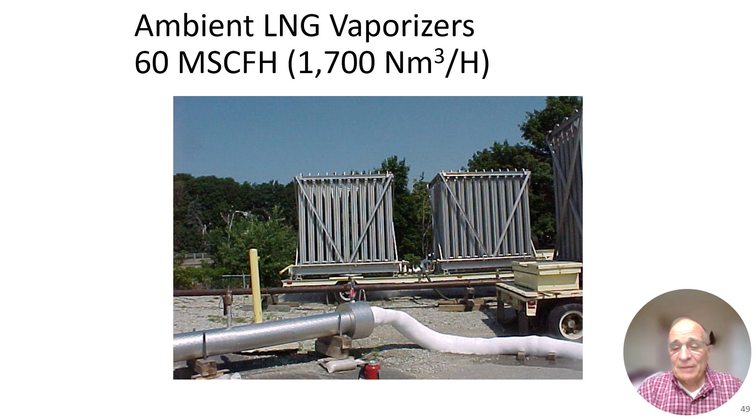You'll also note that some temporary piping was put in place here. Rigid temporary piping was put in to get you to the vaporizer, then a flexible connection was put from that piping to the vaporizer. This is the connection from the outlet of the vaporizer to the pipeline that's going to be supplying that town.

This happened to be a 4-bar system, which is 60 psi.

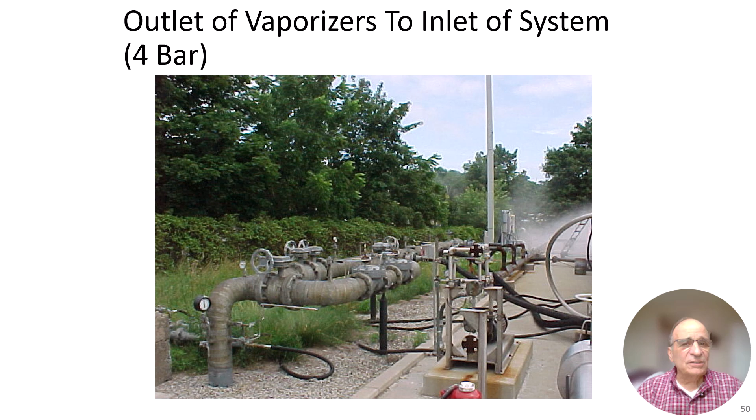This slide shows the ambient vaporizers in the background, and you can see the vapor cloud that I mentioned earlier. This is just another view of the ambient vaporizers, the attempt to make a dike area around the vaporizers, and the vapor cloud.

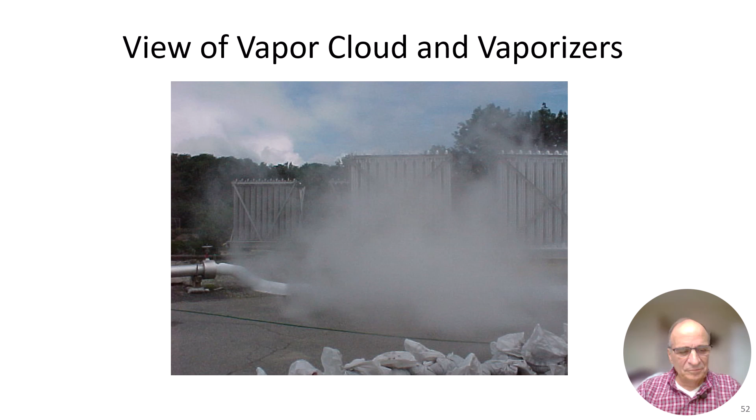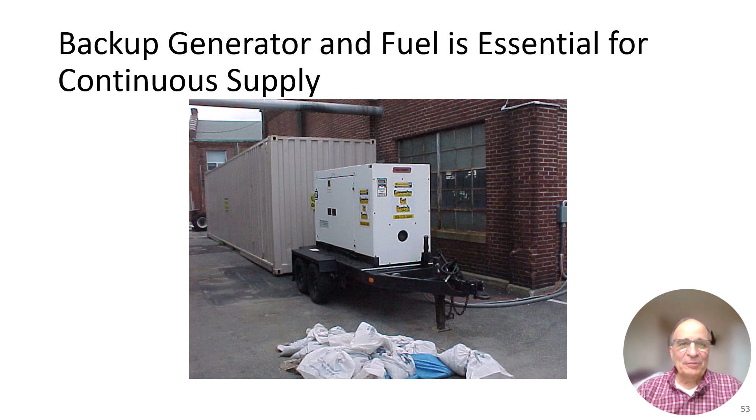On this site, we made sure that we had not only a good electrical connection supply for the vaporizers and heaters, but also brought in an emergency generator just in case we had a power interruption. Last thing you want to do is have an outage in a town when you're supplying it by way of portable pipelines, and you have the outage anyway.

If you want to consider really how bad can it get, think about what would happen if an electric rolling blackout were to occur at the same time as having a peak gas demand day. Most of the year, a rolling blackout of electricity would not impact the gas system significantly. However, on a peak day, it would.

And here's why. The supply of gas that comes into an area is supplying many boilers or heaters that are online. Some of those boilers have just satisfied their thermostat requirement and are offline. So if an electric blackout occurs, every heater in that area would be shut down for that period of time. And then when the electricity is restored, every heater would be calling for gas in order to fire. Due to that, you lose what's called the diversity of your gas load.

The diversity of the gas load means that even during the coldest weather, there are times when some of the boilers will be off. At any given time, a certain percentage would be off and a certain percentage would be on. After an electric blackout is finished and they restore electric power, every thermostat would be calling for gas, and the system is not designed to provide that level of gas supply.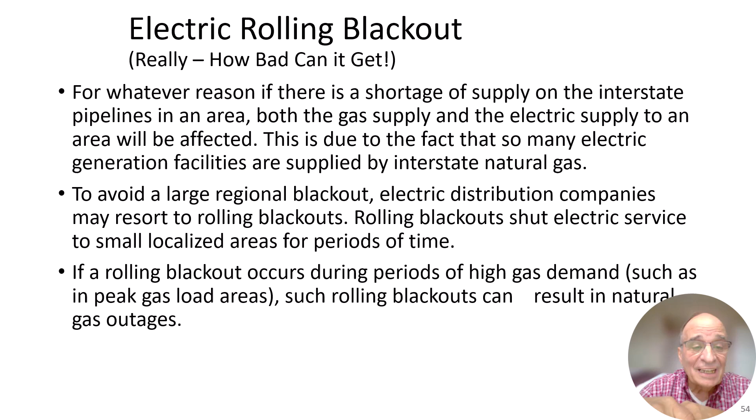The gas distribution system piping is designed to account for the gas loads that have a certain degree of gas load diversity. The gas load diversity means that even on the coldest day, highest load hour of the year, a number of thermostats will not be calling for heat because they've just reached their thermostat set point. However, during an electric blackout, as in a rolling blackout, the majority of gas heating systems shut down and the building would cool down to the point where nearly all load diversity will be lost.

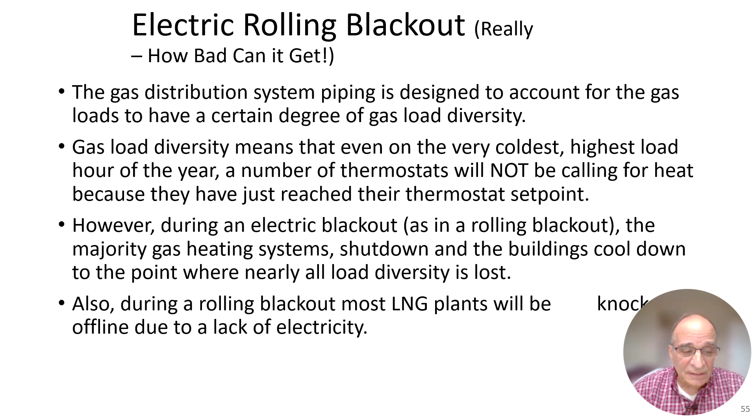Also, during a rolling blackout, most of the LNG facilities will be knocked offline due to a lack of electricity. So it's a double concern during a peak day if an electric blackout occurs: one, the loss of diversity of your load, and two, the loss of LNG facilities that are supplied electricity by that grid.

More about electric rolling blackouts. When the electricity comes back online, every thermostat in the affected area will call for heat. This will overwhelm the LDC's piping deliverability because all load diversity will have been lost. Even if every supply point was delivering at its design capacity, the gas load would be well above the piping pressure drop design.

Every LNG facility that had been knocked offline due to the blackout would not be readily available to come back online. An LNG plant restart may take up to 10 minutes or even more. After the LNG plant restart occurs, ramping up to full send-out may take another 5 minutes. During this startup and ramp-up, excessively low pressures would be likely to occur in the distribution system.

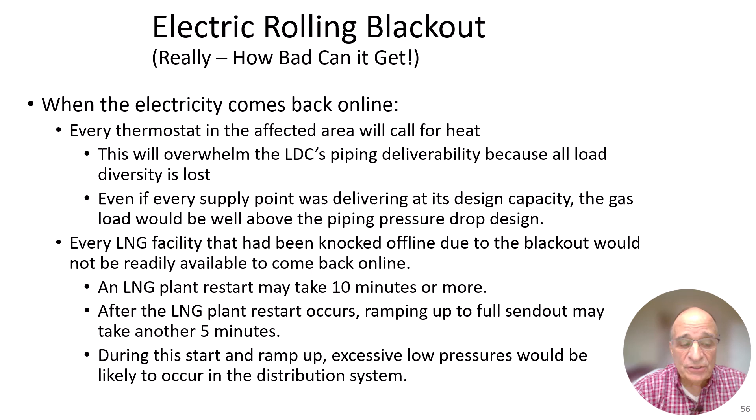What do historic gas outages tell us? Gas outages result in severe customer welfare risks. They may even result in the loss of life. Potential need to relocate customers to places of temporary shelter would be required. A loss of customers' trust in the LDC would occur. Damage would occur to the economy of the affected area. Potential lawsuits against the LDC may occur. A restoration that may take a week to achieve 90% recovery, even with mutual aid, may take many weeks to get to complete restoration. The potential for significant property damage would exist: frozen pipes, perishable goods, etc.

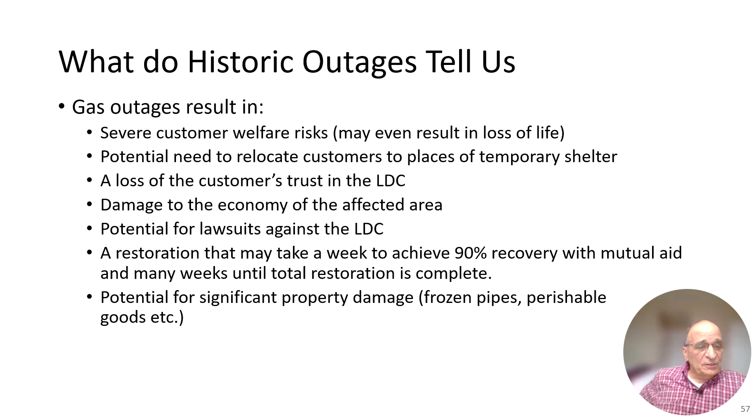So what is the industry's best practice? It's to do everything possible to avoid a gas outage. As it's said, if Margaret ain't happy, ain't nobody gonna be happy. Margaret's our customer, and our obligation is to keep gas flowing 24/7, 365 days a year.